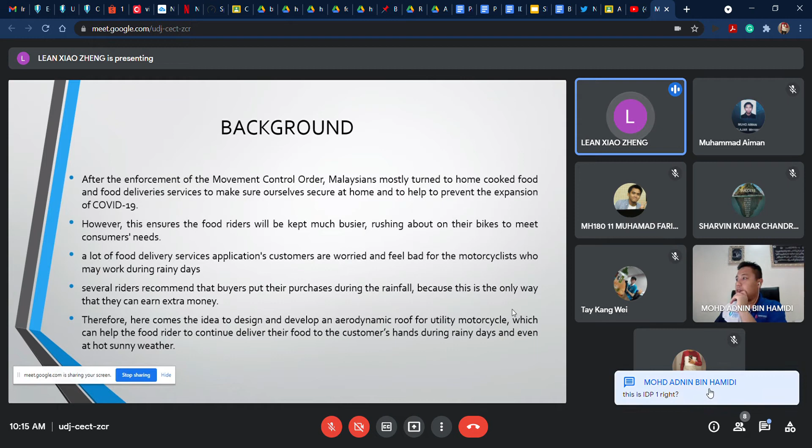Riders will be kept much busier, rushing about on their bikes to meet consumers' needs. A lot of food delivery customers feel bad for the motorcyclists who may work during rainy days. Several riders recommend that buyers place their orders during rainfall because this is the only way they can earn extra money. Therefore, here comes the idea to design and develop an aerodynamic roof for utility motorcycles, which can help food riders continue delivering food to consumers during rainy days and even hot sunny weather.

So we move to the problem statement. The purpose of this project is to design and develop a motorbike roof that helps food riders increase their convenience and safety level when delivering during bad weather such as rainy days and sunny days. As we know, a normal motorbike is not designed to operate during rainy day. Food riders face problems such as blurred vision within the helmet during raining, slippery roads, and riders and their stuff getting wet from the rain, among others.

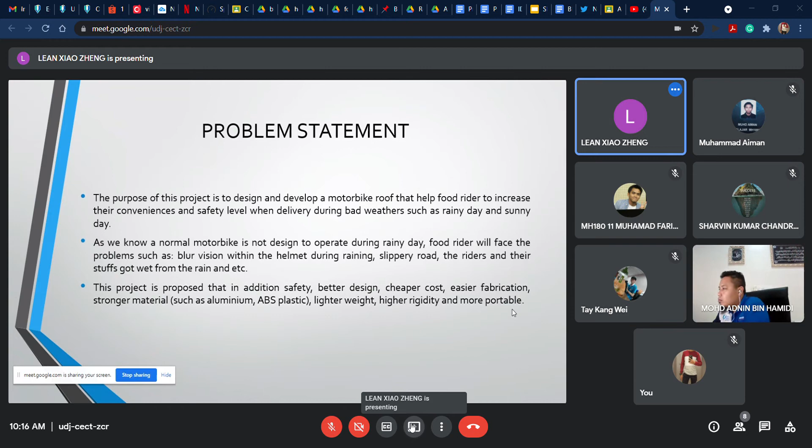This project proposes additional safety, better design, cheaper cost, easy fabrication, stronger materials such as aluminium and ABS plastic, lighter weight, higher rigidity, and more portability.

Next, we move to the scope. Each scope is explained from the objective: to fabricate a retractable roof to cover the upper part of the motorbike from the windshield until the rear of the motorcycle; to design aerodynamic roofs in this project only for two-wheeled vehicles; the roof in this project is designed in an aerodynamic shape; to fabricate the roof using durable materials such as hollow bar and stainless steel; and lastly, to make physical testing under multiple weather conditions such as rainy and sunny days.

So now my friend will continue to the literature review part.

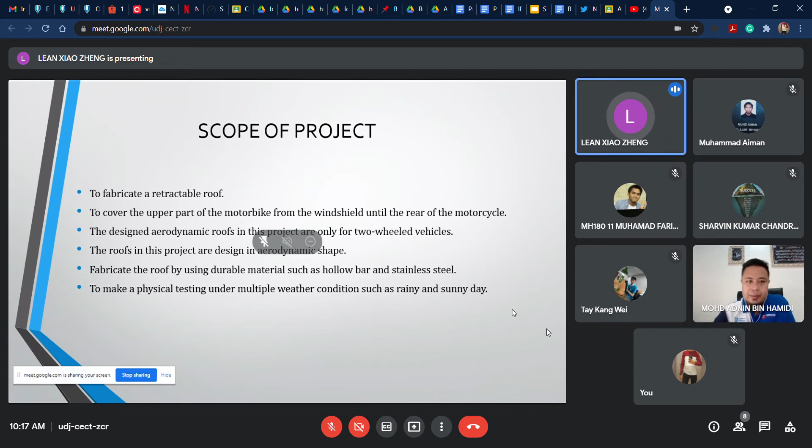The first question: are you a consumer or food delivery rider? 64% of respondents are customers, 36% are riders. Next, what's the top speed riders reach while riding? 42% of riders drive at 100 km per hour, while none drive at 70 km per hour.

Next, which food delivery service do customers often use to order food? 71% of customers use Food Panda, 27% use GrabFood, and 2% use Maxim.

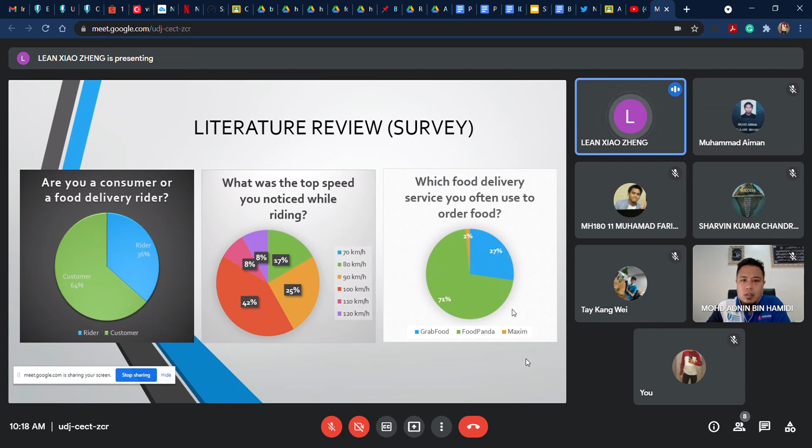Next, in which weather do customers order food the most? Customers order food the most during hot sunny days, at 62%, followed by 36% for rainy days, and 2% for windy days.

During rainy days, will customers use the food delivery service? 57% of customers stated that they will order food during rainy days.

Next, what problem do customers encounter when ordering food during rainy days? The most common problem is late arrival of food, at 73%.

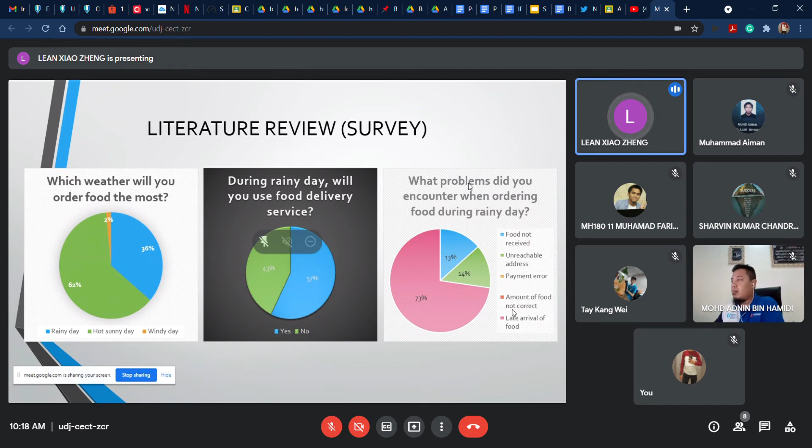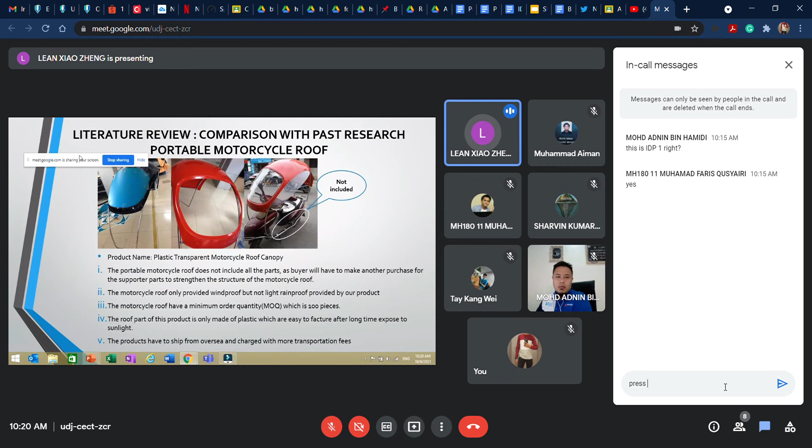The disadvantages of this product compared to our portable motorcycle roof: this product does not include all the parts, as the buyer will have to make another purchase for the supporter part to strengthen the structure of the motorcycle roof. Second, this motorcycle roof only provides windproofing, not as effective as the rainproofing provided by our product.

Next, the motorcycle roof has a minimum order quantity (MOQ), which means the customer has to order 100 pieces at a time.

Next, the roof part of this product is only made of plastic, which is very easy to fracture after long exposure to sunlight. And lastly, the products have to ship from overseas and are charged more transportation fees.

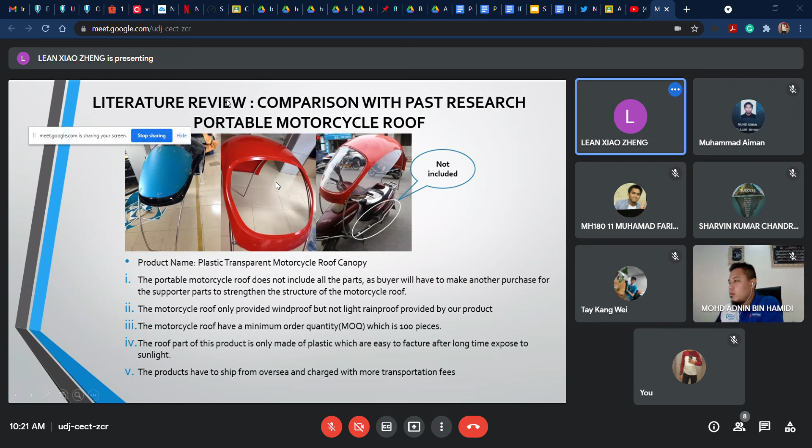Good morning, sir. My name is Sharvin Kumar. I'm going to explain about our methodology for our project.

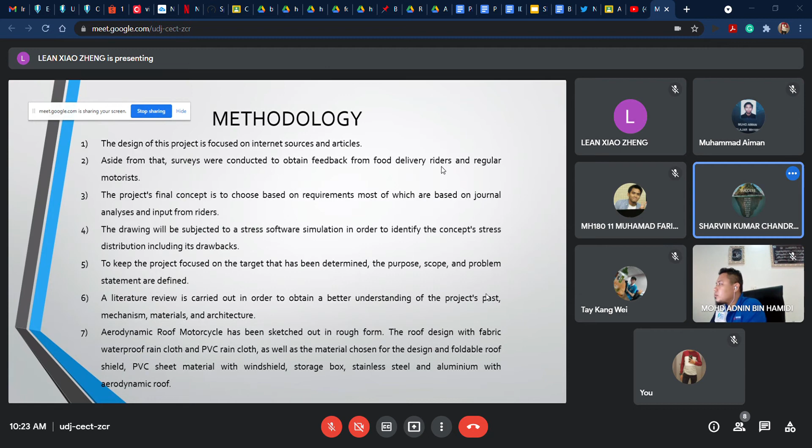Next page, please. Here is our Gantt chart for our project.

Previously, week 1 until week 5, here are the activities: selection of group members and leaders, meeting with supervisor 1, meeting with supervisor 2, sketch concept drawing, meeting with supervisor 3.

Next, week 6 until week 10, we do the evaluation to choose the best design, selection design. We do research on the project and list materials. We conduct a survey and prepare project presentation. Before midterm break, we present the project to the panel.

From week 11 until week 14, after midterm break, we do group discussion again. We design the concept in 2D and 3D drawing. We redesign and finalize the design. We choose the material selection and design calculation. We prepare for presentation, and now we are doing a presentation project to the panel.

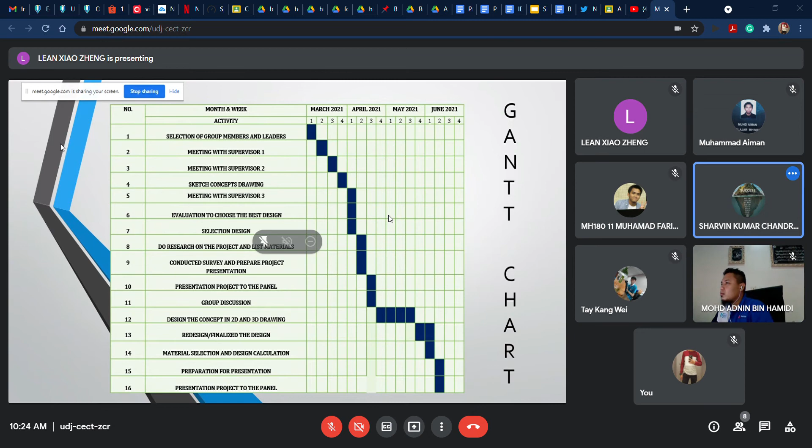Okay, next page. Here is our flow chart. We start the process.

Our group starts the discussion on how to design and develop an aerodynamic roof for a utility motorcycle. Next, we try to improve the design through brainstorming ideas and doing a survey. Next, we come up with an individual design.

After that, we evaluate the design of each group member, and then we choose the best design. After we choose the best design, we start discussion and move to the next level. We start to prepare the slide, final report, and get ready for presentation, ending the process.

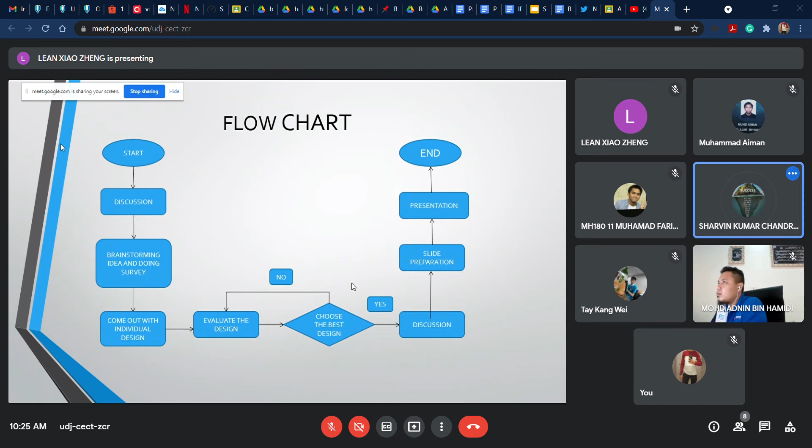Basically, 6 of us have to come out with each design. So here we have 6 designs, but I'm going to explain one by one. As we can see here, there are some advantages and disadvantages for each design.

For design number one, the advantages are lightweight and also having a storage box to keep the roof completely. But the disadvantages are it's quite difficult to fabricate, and the front windshield is too small.

For design number two, the advantages of this design is it can allow 2 people to ride in, and the front windshield is big enough. But the bad side of this design is it's hard to fabricate, and also the food box will get wet during rain.

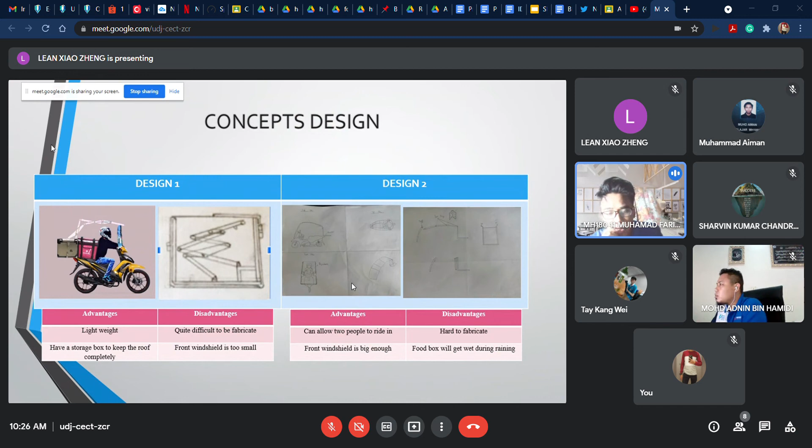For design number three, as we can see here, the advantages is it has a nice design for airflow and also covers both upper and lower part of the rider. While the disadvantage of the design is it's not so convenient to portable.

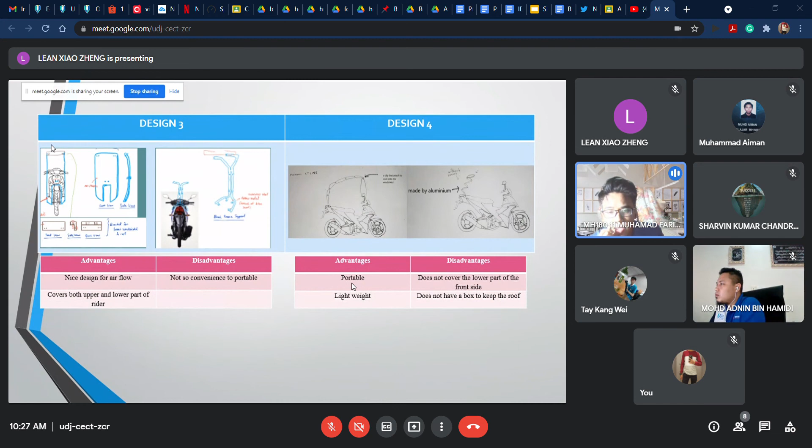For design number four, the advantages of this design is it is portable and also lightweight. But the disadvantage is it does not cover the lower part of the front side, and it does not have a box to keep the roof.

The second last design, as we can see here, the advantages of the design is it's lightweight and portable. But the bad side of the design is the pillar that affects the riders and the food box exposed to outside.

And the final design, the advantages is it is lightweight and also easy to use, but the disadvantage is about the rigidity of this design and also poor structure.

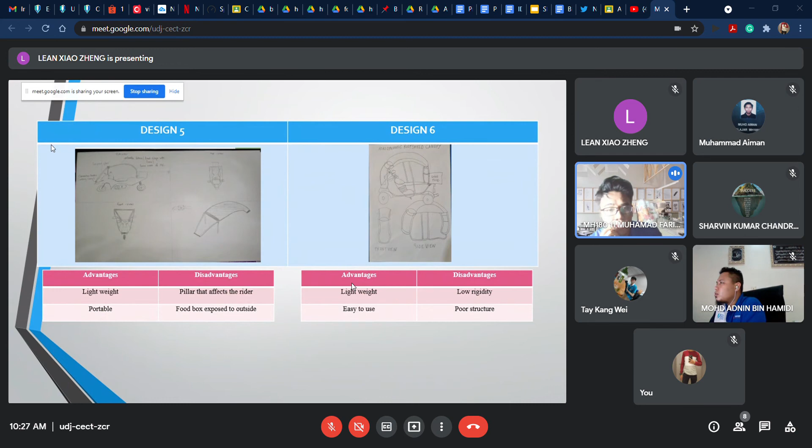So we did some evaluations in order to determine which design is the better one. From scale 1 to 5, each of our group members had to evaluate others' designs, and this is basically the data or the result of the evaluations. As we can see, the highest evaluation, the highest mark, is for design one and design three.

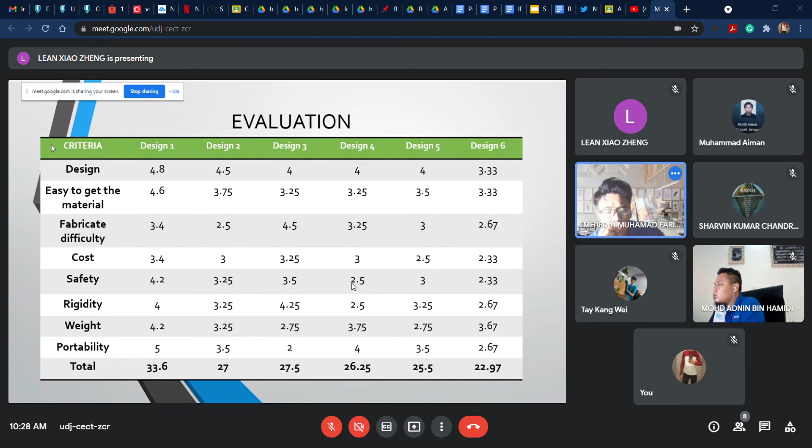So based on the evaluation of all members, we decided to combine design one's roof and design three's windshield, since design one's roof seems to be portable, and design three's windshield covers more parts of the rider. The design one roof seems to be the most portable.

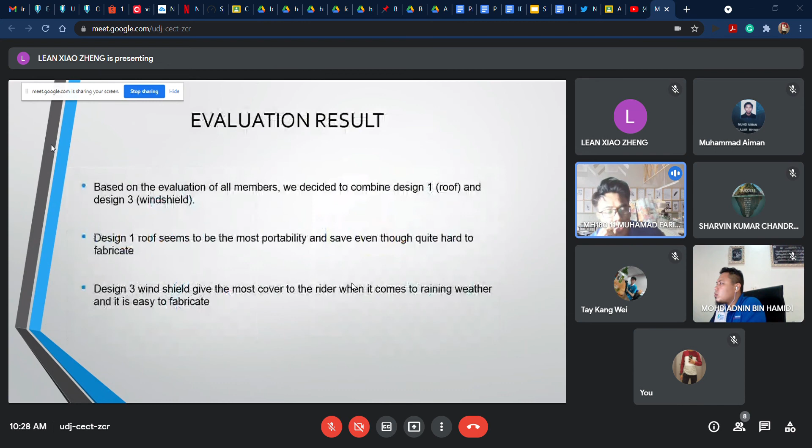This is basically the sketches of the combined design of design one and design three. On the left side, we can see the roof when it is retracted, and on the right side, we can see the roof condition when it is extended.

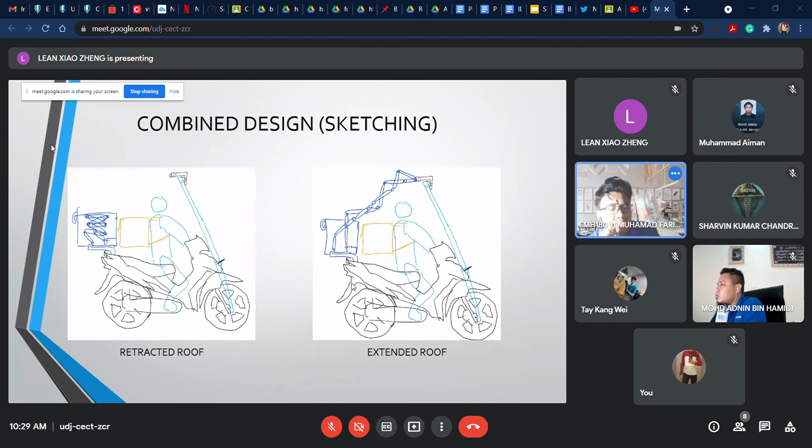This is basically the SolidWorks model for this combined design. Here we have the final view of the design.

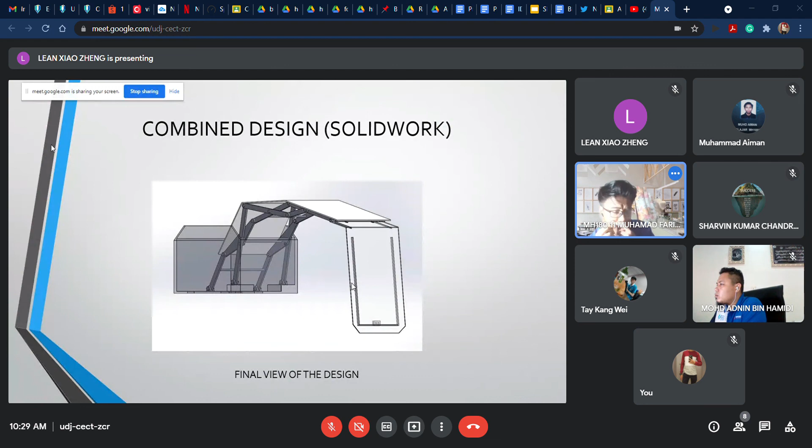Here are the top view, side view, and also front view of the design. I also included some views for the roof when it is closed. So this design may not be 100% accurate, but it most likely should be like this when we fabricate the design.

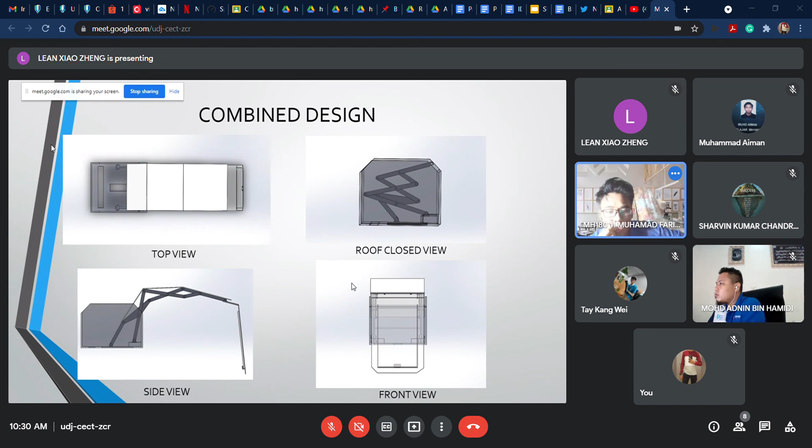And here for the roof, this is the isometric view for the roof. I included the dimension for each part of the roof.

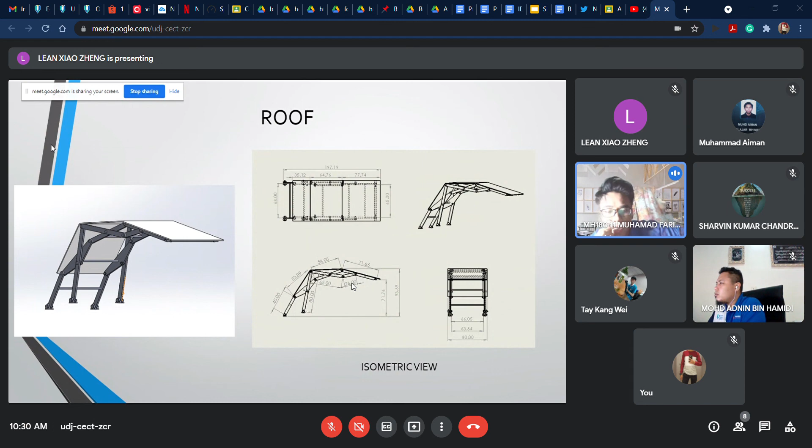This is for the storage box, also with the isometric view and the dimensions of the box.

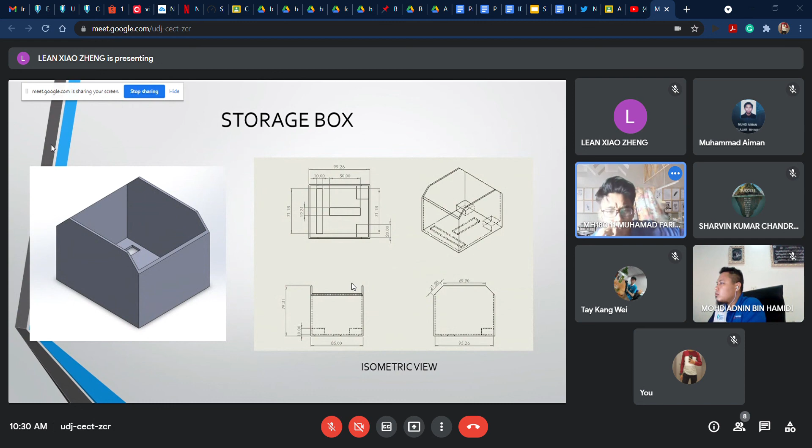And this is the SolidWorks for the windshield, and I also included the isometric view and the dimensions of the windshield.

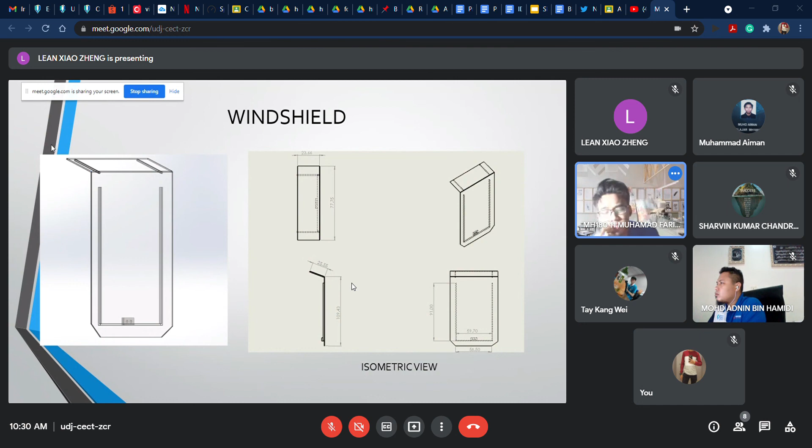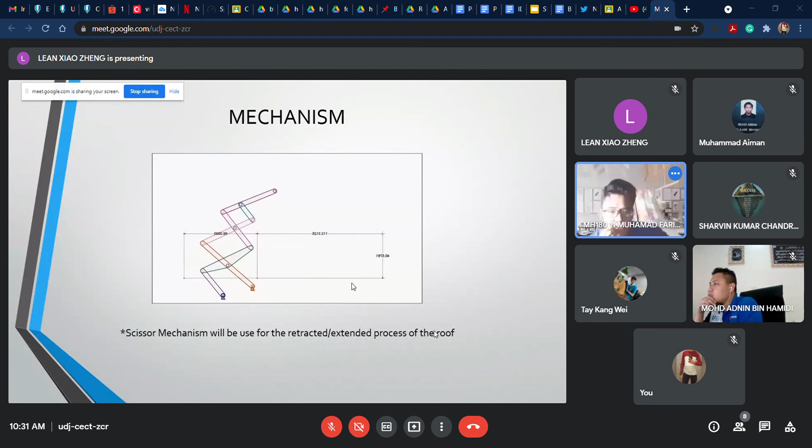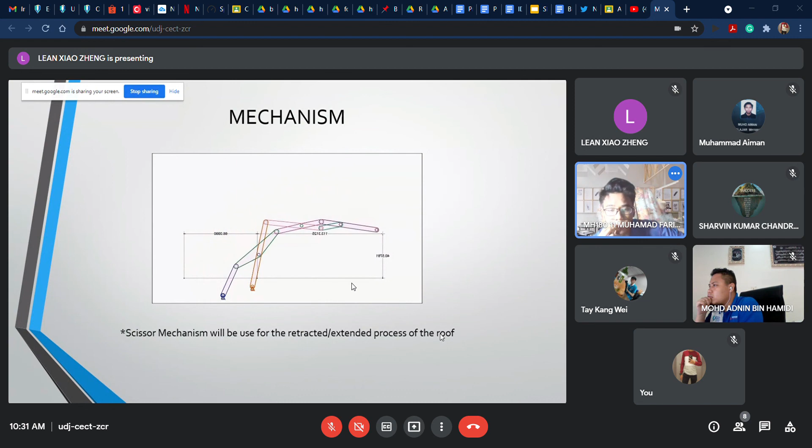So here is the process for the retracted and extended process of the roof. Okay, proceed with the next slide. Thank you.